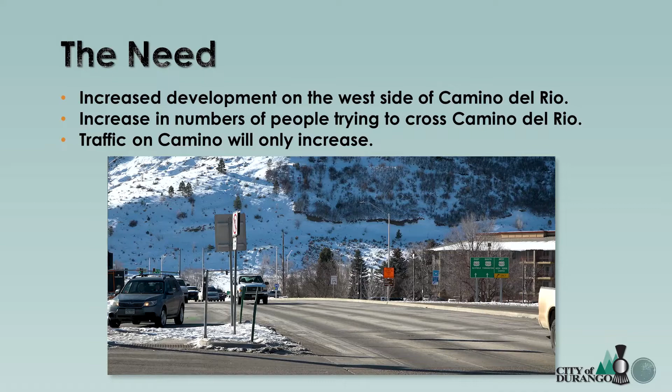The need for a safe and easy connection at 12th and Camino has been made apparent over the years by the increased use of the Hawk Crossing since its 2011 installation, as evidenced by the city's pedestrian and bicycle counts. Increased development on the west side of Camino del Rio and along the entire U.S. Highway 550 corridor has increased the number of people trying to cross Camino del Rio. Development is also adding to the traffic on Camino del Rio, which is only anticipated to increase in the future, making a safe and easy connection that much more important.

Camino del Rio, or U.S. Highway 550, moves approximately 30,000 vehicles per day through Durango. Camino serves as a major transportation route for goods and people. There are only 3 existing crossings of Camino del Rio that provide connection to the Animas River Trail.

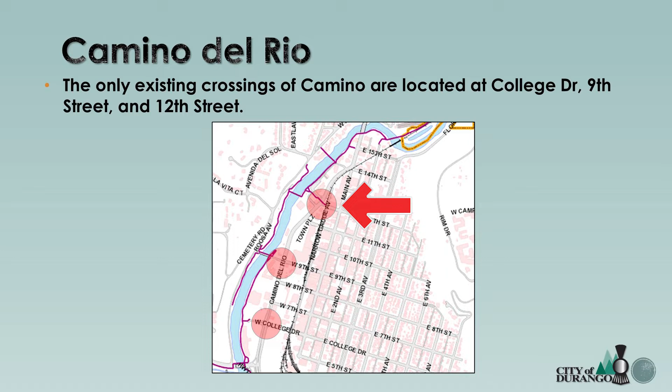College Drive and 9th Street are signalized intersections with one crosswalk each and varying bike infrastructure. The Hawk Beacon at 12th Street provides an at-grade crossing outside of a signalized intersection with a direct connection to the trail. While all these crossings provide varying safety and connection, they are not the safest or most convenient crossings for bicyclists and pedestrians. These crossings are also affected by traffic volumes, whether waiting for the light to turn green or the Hawk Beacon coordinating with the signalized intersections and traffic.

They are not quick options. These at-grade crossings also have a significant negative effect on Camino del Rio's vehicular capacity, often stopping traffic on the main line and creating bottlenecks for the city of Durango and CDOT's traffic system.

An underpass along Camino del Rio has been a conversation for nearly two decades. The conversation went from discussion in plans to a study in 2009, when the first feasibility study was conducted and determined an underpass between 10th and 14th Streets was not feasible at the time. In 2011, the Hawk Crossing was installed by the city at 12th Street, providing an at-grade crossing.

Then in 2012, the city adopted the Multimodal Transportation Master Plan, which identified the need for a grade-separated crossing of Camino del Rio. This need was again identified in the 2016 Multimodal Transportation Plan. In 2020, a new feasibility study looked at crossings throughout the Camino corridor and determined that an underpass near Veterans Way and 12th Street would be the best mid- to long-term solution.

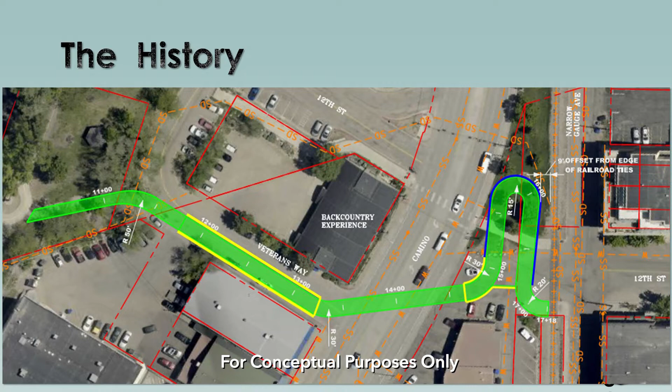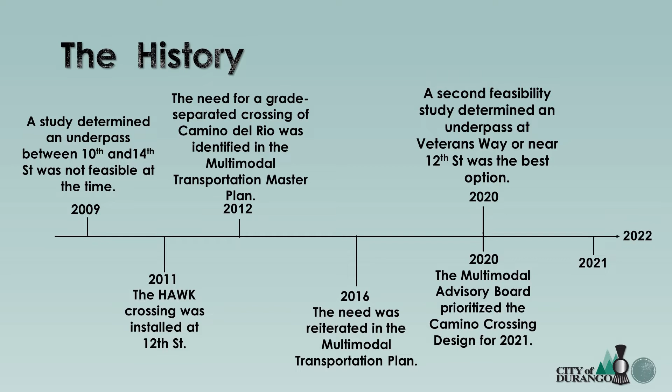The Multimodal Advisory Board prioritized the Camino crossing and recommended it to City Council for funding from the 2015 half-cent sales and use tax fund in the 2021 budget. City Council approved the budget request and the design project was funded. The project was awarded to a local consultant team, SEH, in the fall of 2021, and the design project began.

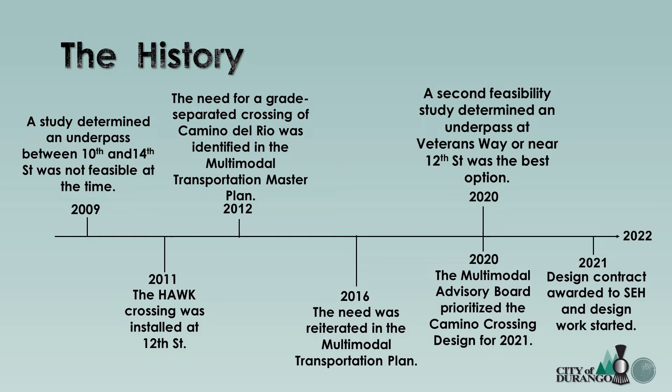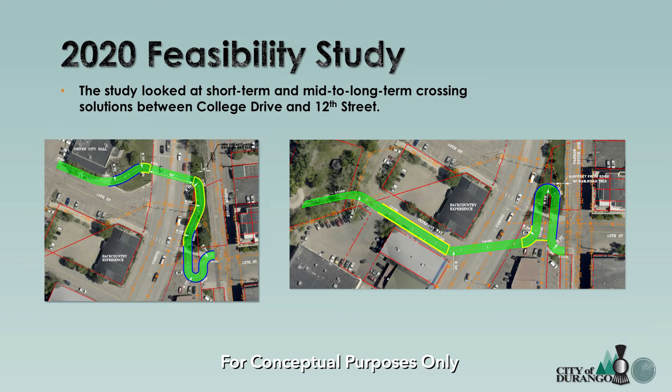The 2020 feasibility study also investigated short-term and mid- to long-term crossing solutions between College Drive and 12th Street. The study determined that the most feasible grade-separated crossing in the North Camino corridor was near 12th Street or Veterans Way. The goal of this project is to design a crossing that people will want to use and is convenient and/or appealing.

It is accessible to all pedestrian and bicycle users, including those with a disability, which means designing it at grades that everyone can maneuver. The crossing needs to be safe. Lastly, it needs to be easily maintained.

To meet these goals, the crossing has several design parameters. First, it must be an underpass. Second, it cannot modify the train tracks in any way. Third, it must be located between Veterans Way and the north end of River City Hall west of Camino, and at or north of 12th Street east of Camino.

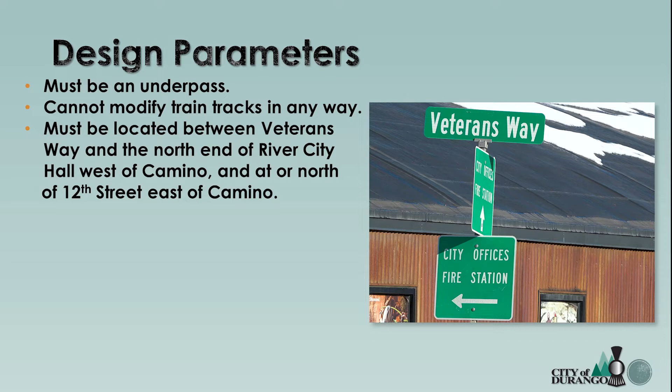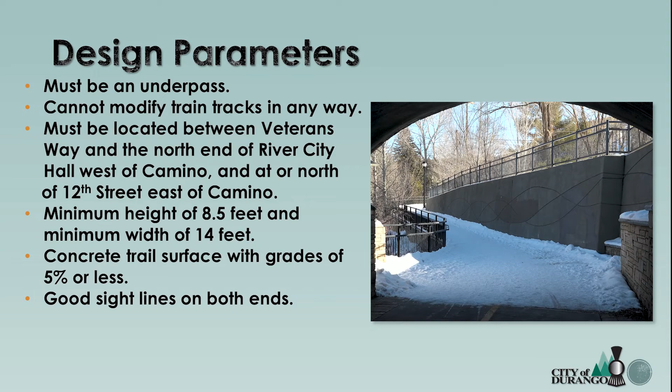Fourth, the minimum height is 8.5 feet and the minimum width is 14 feet. Fifth, the trail surface must be concrete and have a grade of less than 5%. Sixth, sufficient sight lines on both ends. Seventh, landscaping will need to be incorporated into the entry ramps and artistic design elements throughout.

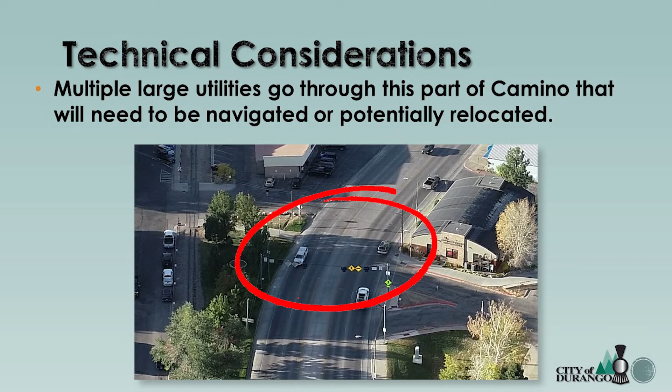As with any large infrastructure project, there are technical considerations and requirements that are part of the design. This part of the Camino corridor has multiple large utilities that will have to be navigated around or relocated, potentially being costly challenges. The underpass will also need to connect appropriately to existing infrastructure on either side of Camino.

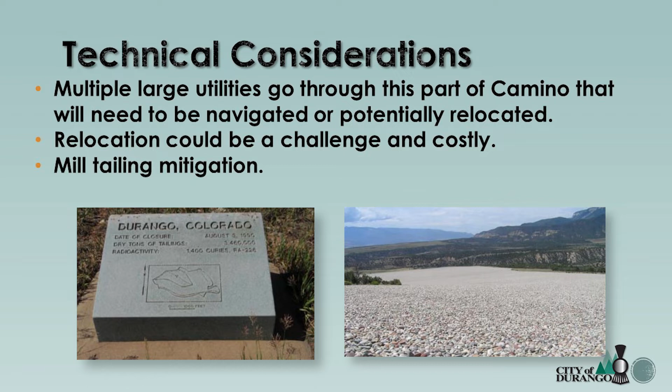As with much of Durango, there are mill tailings in this area of the Camino corridor that will likely have to be properly handled and disposed of per CDPHE's Uranium Mill Tailings Management Plan. Drainage will need to be managed to prevent pooling within the underpass. Design will need to take snow removal and ice buildup into consideration.

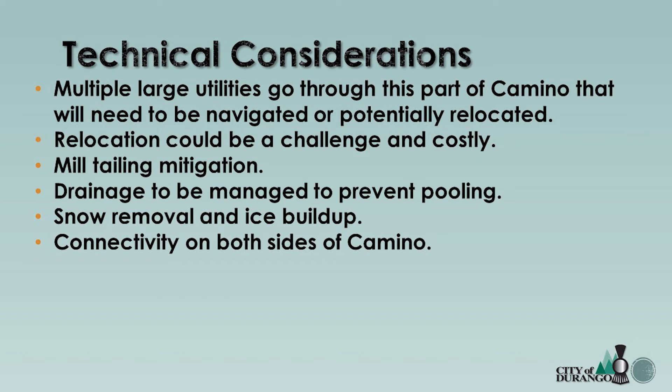Most of Camino is surrounded by private property, necessitating any alignment to involve easements, licenses, or acquiring property for the connecting ramps. Lastly, the existing access to businesses and 12th Street will need to be considered and accommodated with any design. What happens after the Design Charrette?

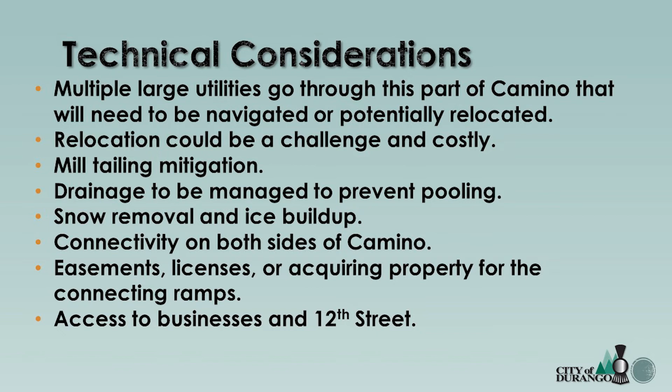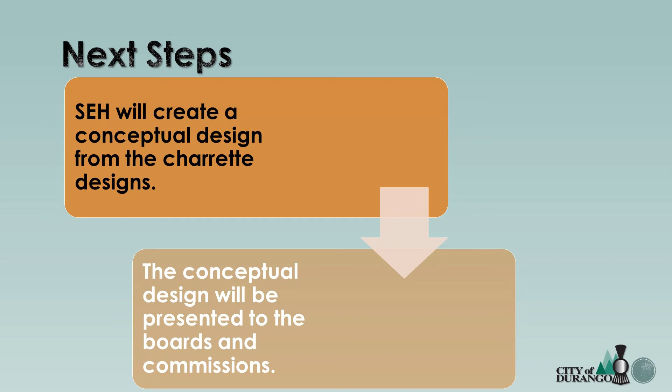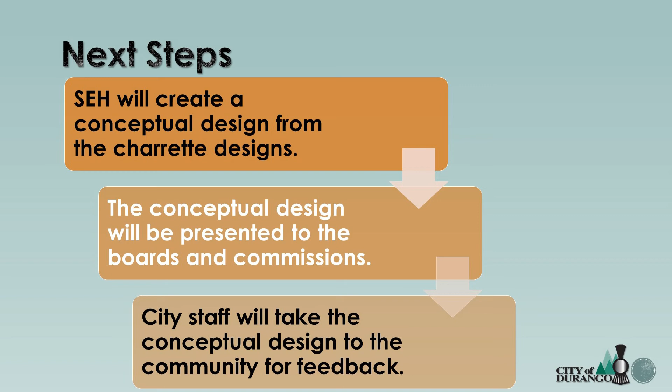SEH will create a conceptual design from those created during the charrette. That conceptual design will be taken to each of the regular meetings of the participating boards and commissions. City staff and the design consultant will also take the conceptual design to the public to receive the community's input. The consultant and city staff will then work on the engineering and technical aspects of the draft design and address comments, then bring the design back to the public for final comment.

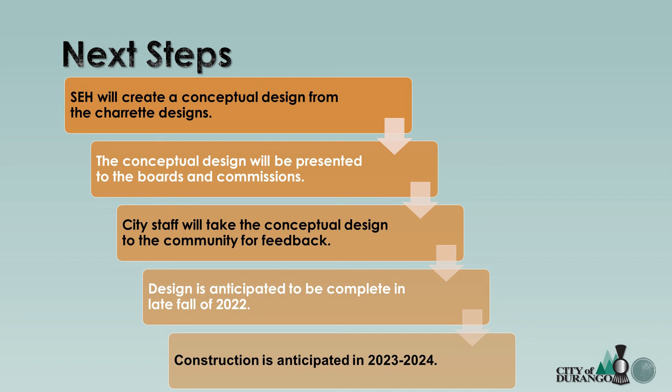Design is anticipated to be complete in late fall of 2022. Construction could then begin 2023 to 2024. Thank you for being a part of this process.